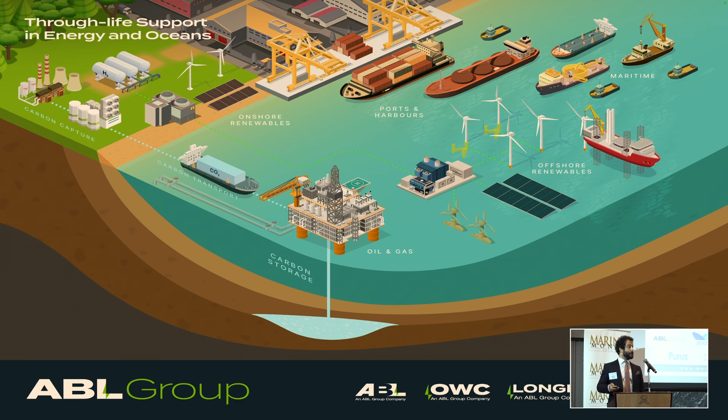So, after all this, let's dive into the topic. First, we need to ask ourselves: what is technical due diligence?

Imagine right now there are 3 engineers working on a project. One is not seeing anything deeper than the surface. The other is not hearing what others are saying, not hearing what the market is talking about. The other is not writing anything in the report they prepare as findings. Would that be a technical due diligence in that case? Well, obviously not. This is exactly the opposite of what I just said, but we need a description here.

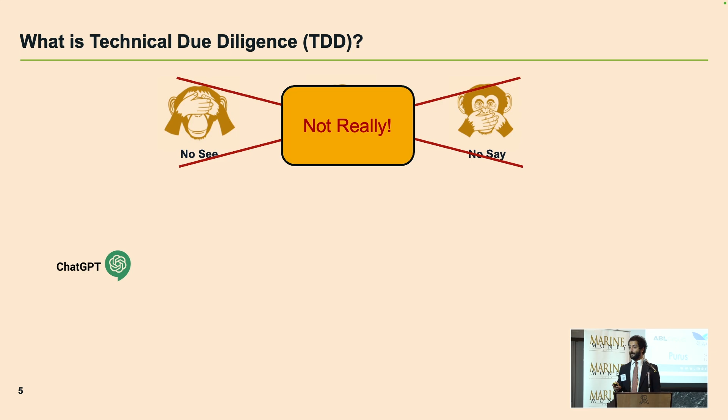So I asked ChatGPT, and ChatGPT says: imagine a team of Sherlock Holmes with calculators and hard hats, who are conducting an objective evaluation to uncover risks, assess feasibility, and verify performance of a project.

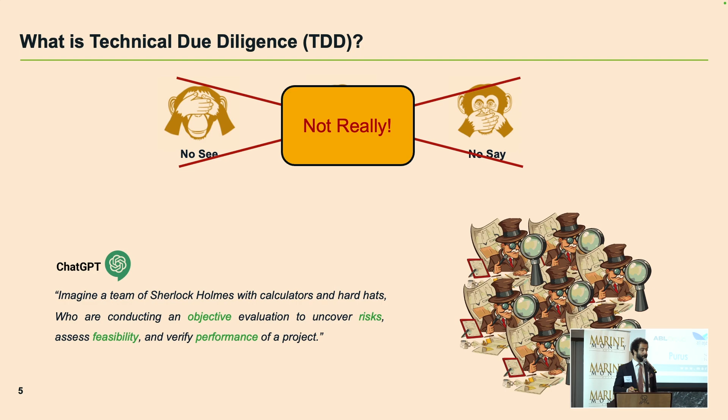Okay, but why do we need technical due diligence? Imagine a scenario: you've been dreaming of a blue car since ages, okay?

You cannot afford the brand new one, you need the second-hand one. You're saving and saving and saving. Your hard-earned money is in your pocket. You go to a dealership. You see your brand new, nice, beautiful blue car there. What do you do? Your hard-earned money in your pocket, you put it on the table, and then you say, shut up and take my money and give me my car.

No, we don't do that. We actually do something opposite. We just ask them to have a look at the car, or take the car to a service center, to ensure that the car is working properly, and then the car is going to be providing me the service that I paid for, for the next 10 to 15 years, right?

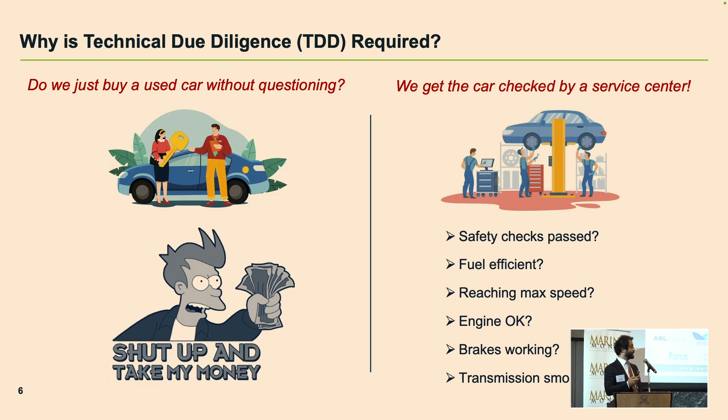So in a project environment, it's the exact same story. If I have some funds available, what I would then do is look for a project to invest my money in. Obviously, I want this project to return some investment on my investment, right?

And projects are complex. To be exact, on a floating offshore wind technical due diligence, there are in total 12 different disciplines that we employ. Basically, we cannot know everything about all these disciplines. That's why we go to an independent company and ask them to carry out a technical due diligence study for us. Then we identify some risks, we try to mitigate them, and the best thing of all is we renegotiate the terms and conditions and reduce the prices, okay?

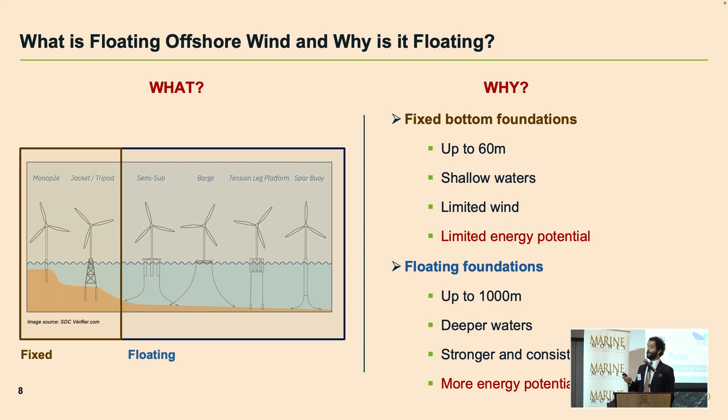The answer is clear. Fixed bottom is in shallow waters, limited wind, which means limited energy. But we want more energy. That means we can go with floating offshore wind to deeper waters where there is constant and strong wind, which means we can get more energy out of it.

Okay, that's the story. Let's look at the timeline of offshore wind. The story started in the early 2000s, and we are right now in 2025. As you can see, there are some pilot projects and demonstrator projects, but we still don't see any commercial floating offshore wind farm in place. The reason for that is there are so many risks and uncertainties still, okay?

I want you to focus on this from 2025 until 2050. Whichever database you look at, you will see so many projects planned within this period. Nothing happened so far in the last 25 years, not so much happened—not nothing, but that does not mean nothing will happen in the next 25 years.

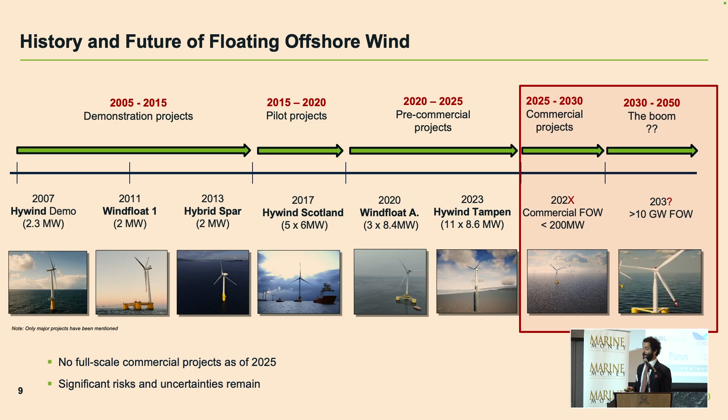It will take time, but it's gonna happen, it will happen. But, as the title suggests, transition can catch you out. What does that mean? It is going to be a bumpy road, okay? It's not going to be easy. So things will go wrong.

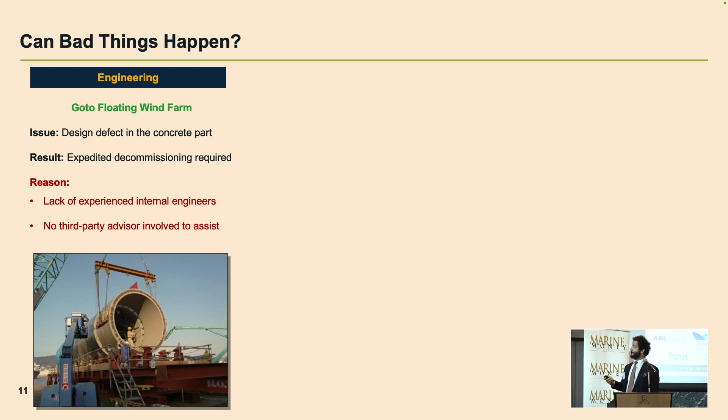And things went wrong in floating offshore wind. One example here, you see the Goto floating offshore wind farm. They designed the floaters wrongly because they did not consider the fatigue. And after installation, they had to decommission 2 of these floaters that they installed.

Another one, Fukushima—basically, during the installation, they couldn't ballast it properly. There was an issue, obviously. So you see that excessive list, it almost capsized.

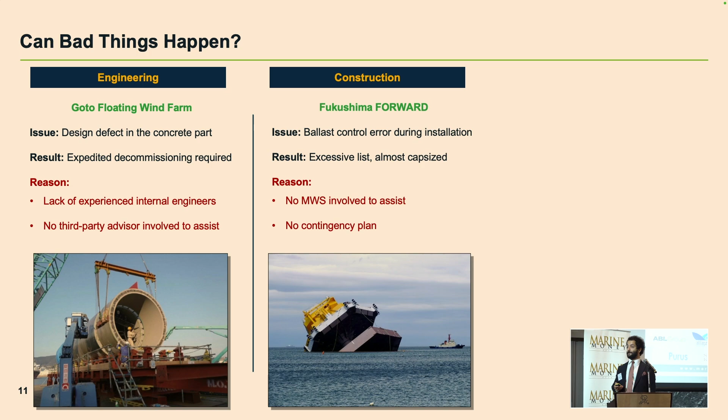This is the one that I love, Hywind Scotland. After 7 years of service, the entire offshore wind farm, floating, needed to go through an operations and maintenance campaign, which means they had to tow this entire thing to port, and they paid millions and millions and millions. Could I have saved this money? Absolutely, yes.

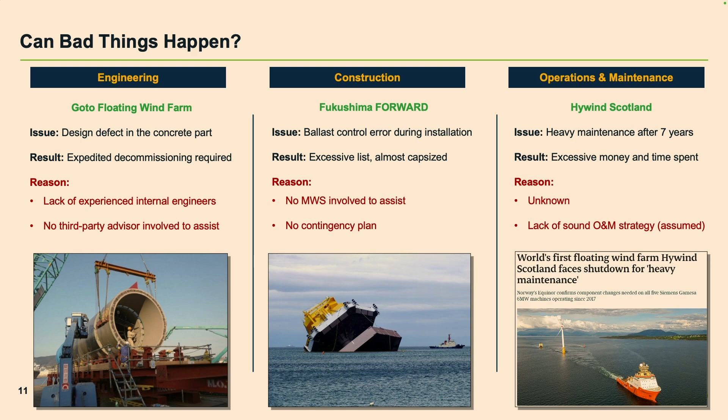So after all these, I would like to dive into the challenges. What are the challenges? The first one is CapEx, OpEx, and the decommissioning expenses.

So look at this one: 2 exact same capacity offshore wind farms. The fixed cost, let's say $2.3 billion, and floating would cost $3.6 billion for a same capacity, 450 megawatt offshore wind farm. The difference is $1.4 billion. For those who cannot imagine what this means: 1 million seconds is 11.5 days, 1 billion seconds is 31.7 years. What I'm trying to say is the cost difference is enormous at the moment.

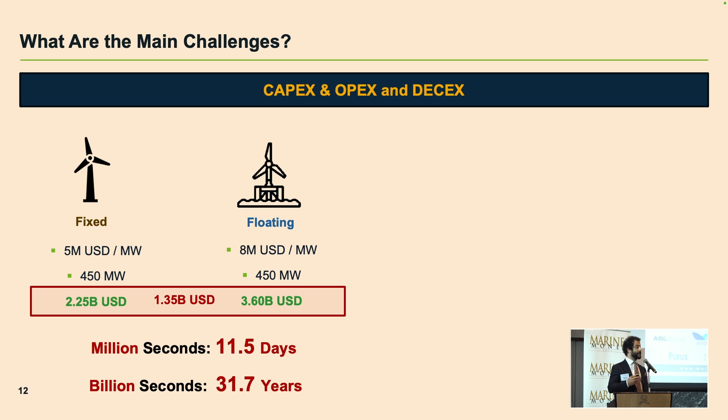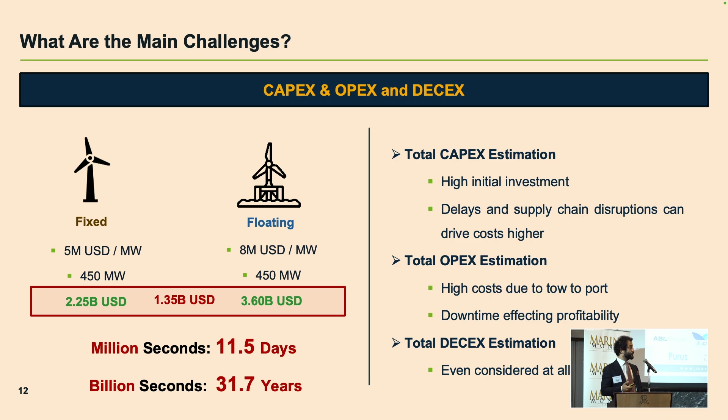So there are high investment costs, and due to the uncertainties, potential delays, and supply chain disruptions, the cost can go even higher and higher. And OpEx—because of the tow-to-port story we are discussing, the downtime of the turbine is crazy. So you're not just paying for the operations and maintenance, at the same time you're losing money from the profitability that you would make.

The last one is a very funny one. In the technical due diligence stories we do, the decommissioning expenses are sometimes not even considered. These offshore wind farms need to be decommissioned at some point, and there will be a crazy amount of money put into this. It will eat from the profitability that you calculate from day one.

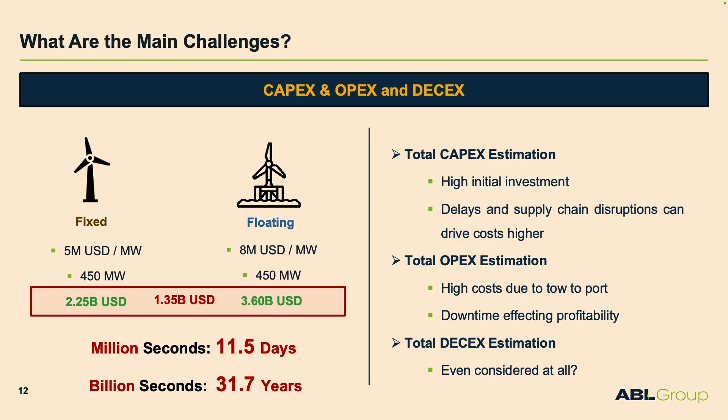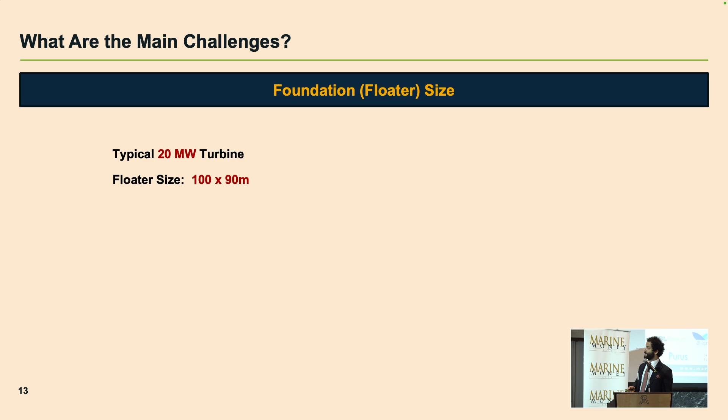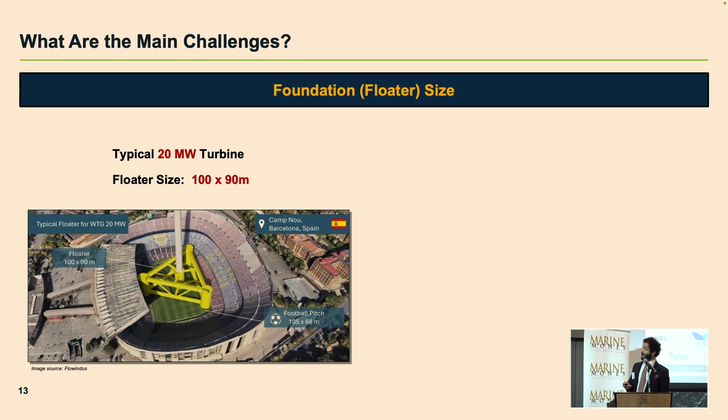So what does that mean? There's a fabrication problem—are there suitable fabricators around which can actually fabricate these on a commercial scale? Number one. Interim transport—these things need to be fabricated somewhere, then transported to a port so they can be taken to be installed. Tow-to-port approach—as we said, they will be towed to port to do the maintenance, and for that you need dry docks, like for ships. Are there any dry docks available?

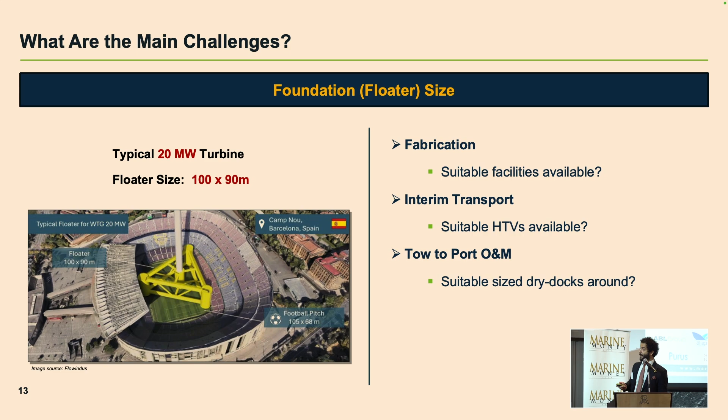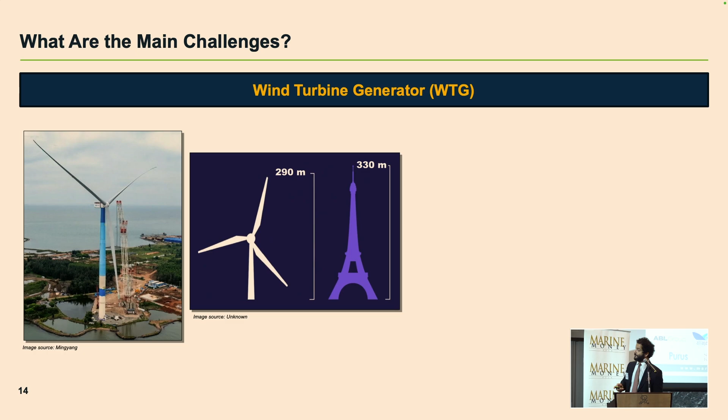Next one is interesting. Most of you have seen the Mingyang 20 megawatt turbine, which is right now tested onshore. To imagine what this size is all about, there's a comparison picture I found, comparing it to the Eiffel Tower. The Eiffel Tower is 330 meters, and this thing is 290 meters tall.

The interesting thing is look at this blade. 290 meters tall, with one blade size of around 150 meters. Imagine all the ships available in the entire world and how many of them can transport this. Increasing sizes obviously create logistics, transportation, and installation problems.

Reliability is another problem at the moment. We said Mingyang - no offense here - but when we say Chinese, the industry stops and thinks five times about whether these things are reliable. Even for wind turbines already in use, when doing technical due diligence, we look at the failure history: what is the downtime, how many times a component exchange was needed, what was the downtime of that, which means how much money I lost.

The next one is again delivery - if they're going to basically be delivered as promised.

But the last point is very interesting. We all talk about these problems politically - today we talked about the US and all this stuff. We all know what's there politically. The question we all ask is: one day, like it happened with solar panels, China will supply so many turbines to Europe or the entire world. It will happen, it's unavoidable. So the question is, after 25 years from now, due to some political issues, will there be any sanctions? Will my turbines actually be utilized, and will all the required spares be provided or not? All these questions are still remaining.

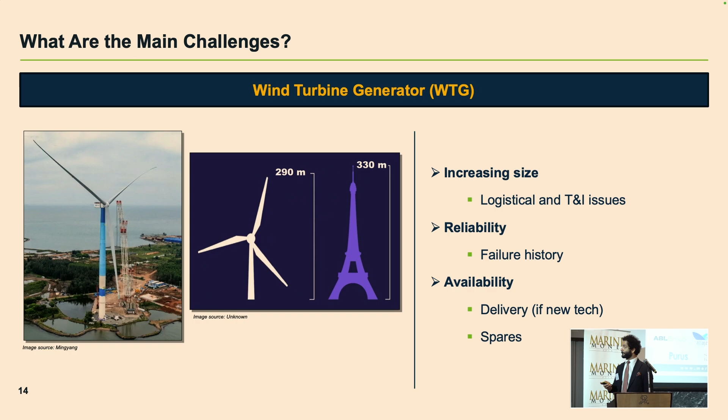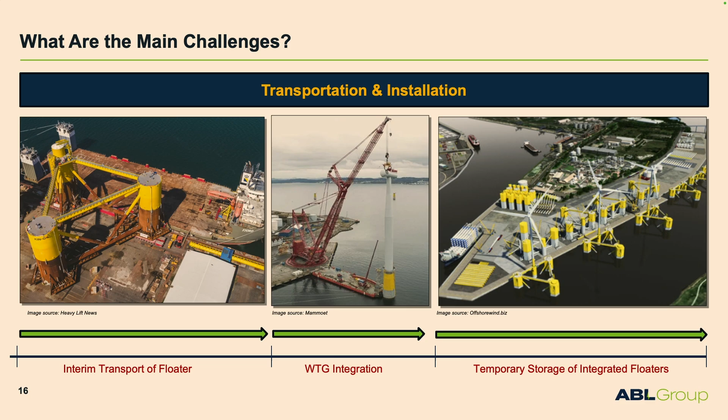Next one is my lovely topic - I'm a T&I guy. Transportation and installation is a complex topic, and for floating offshore wind it's even more complex. These floaters are constructed or fabricated somewhere and need to be transported by heavy transport vessels, HTVs, from the fabrication yard to the yard they're taken afterward - the port, basically, the marshalling port we call it. Afterward, at that port, they would be integrated with the turbines.

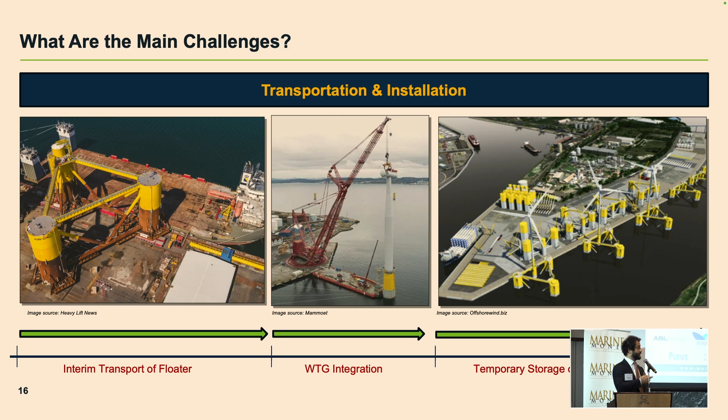That means assembling the turbine sections on top of the floater. Then at the port, after they're integrated, these turbines would wait in line, in queue, for their turn to be taken offshore for installation. While this is happening, we would simultaneously install the anchors and chains, and the dynamic cables - which transmit electricity between the turbines and also to shore. The anchors and chains are there to hold the station of the floater.

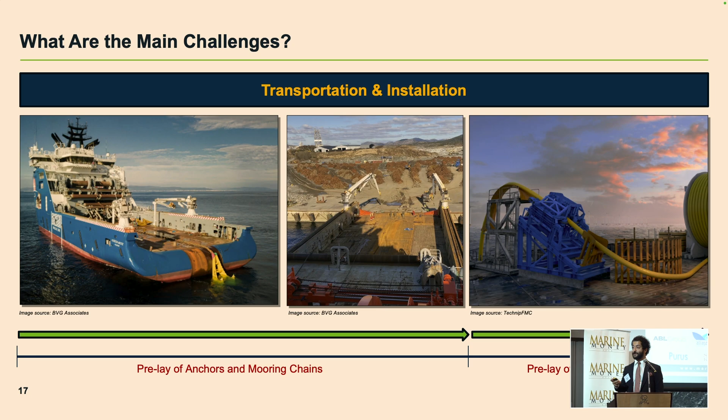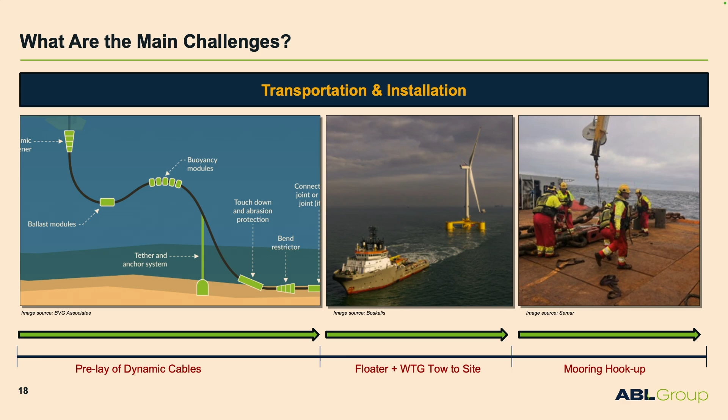Then the floater is towed to the site. We do the mooring hookup, which means connecting the floater to the mooring lines already pre-installed, and then connect the cables to the floater - we call it cable hookup. Then the hookup is complete, and you have a beautiful floating offshore wind farm. It's very easy to explain, isn't it?

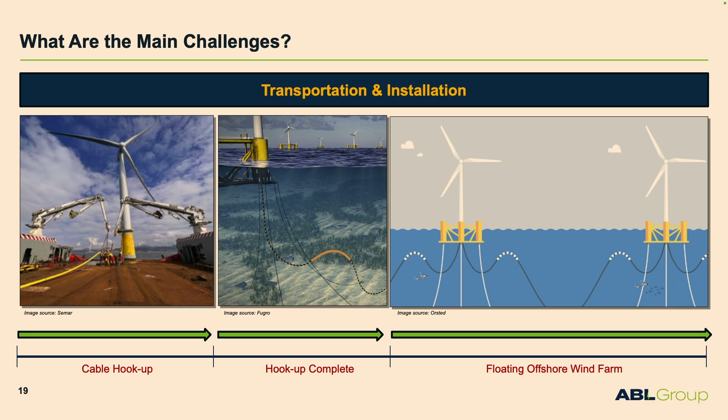In reality, so many things can go wrong in this entire story I just explained. I cannot talk about all these risks today, but I have some of them here. The first is suitability of the port - is the port big enough to do the assembly and temporary storage of the floaters? Let me tell you something very interesting: in Europe, we are working on maybe 5 or 6 projects simultaneously, and all of them want to use the same port.

Which project is going to use this port? This port is available, everybody says, I'm going to use that port. In reality, maybe this port is not even going to be available.

Availability of vessels and cranes. Again, we are talking about AHTS with crazy bollard pull requirements, literally needing around 200 tons bollard pull to tow these things around. If you use one single vessel, it's not even possible. How many of them are available? You need to think about this and plan it accordingly.

Ring cranes. You have seen these crazy heights, around 300 meters for the turbine. These things are huge. We need some large ring cranes or even jack-up vessels to integrate these onto the floater.

Experience of the EPCI contractor is interesting. It's a new technology. Not everybody is experienced in how to install it, like in oil and gas, so there will be some problems. In the contracts that you sign, there will be so many gaps. There are gaps. We do these technical due diligence studies. We see these at the moment.

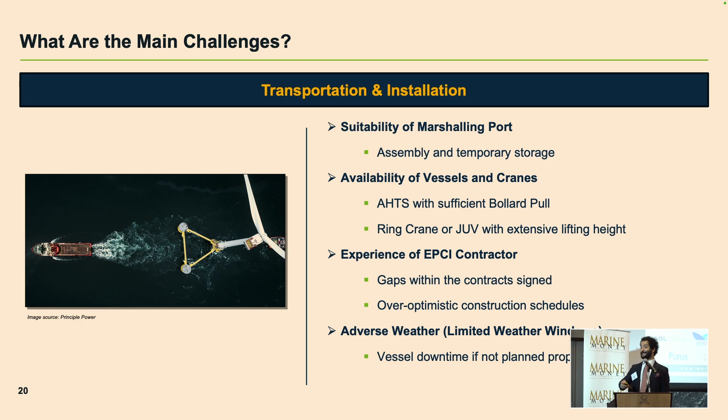An optimistic construction schedule - everybody says I'm going to install, say, one turbine every week. Good luck with that. It's not going to happen, I can tell you that. And the project shows that on paper at the moment, and the money is spent based on these projects, based on these assumptions.

Adverse weather. Everything is floating. What does that mean? That means I am bound to the weather. If the weather doesn't allow, I cannot do anything, and there will be problems if it is not planned properly. All of this vessel spread that we need will be waiting on standby. Who is paying for that?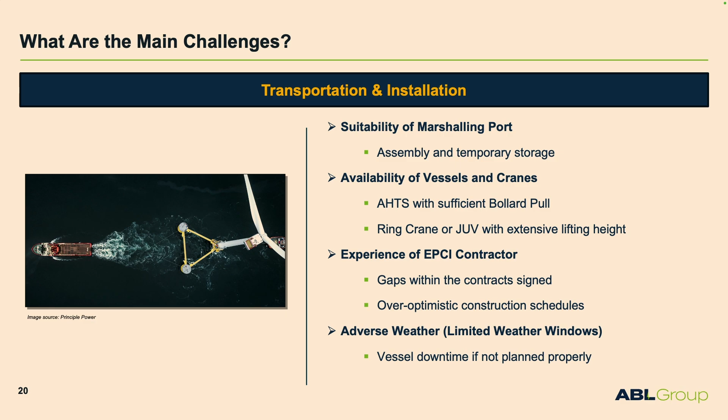The next one is operations and maintenance. We talked about the tow-to-port approach, remember. What is that actually? All this T&I stuff I explained sounds like a joke, but it's reality. For the tow-to-port approach, operations and maintenance has to be done in reverse.

For each turbine, whenever we need to change a blade, at the moment it's happening like this: you have to disconnect all the mooring lines, all the cables, tow this entire thing to port, put it into dry dock, fix it, and then tow it back and reconnect. What does that mean? My turbine is not generating electricity during this entire time. Did we consider this in our profitability analysis in the very beginning? If you didn't, you will have a problem.

And availability of the dry docks in close proximity is an issue. The sizes that I just showed, right? I'm talking about 90 to 100 meters. What dry dock is there right now which can accept it? It's very difficult to plan these things.

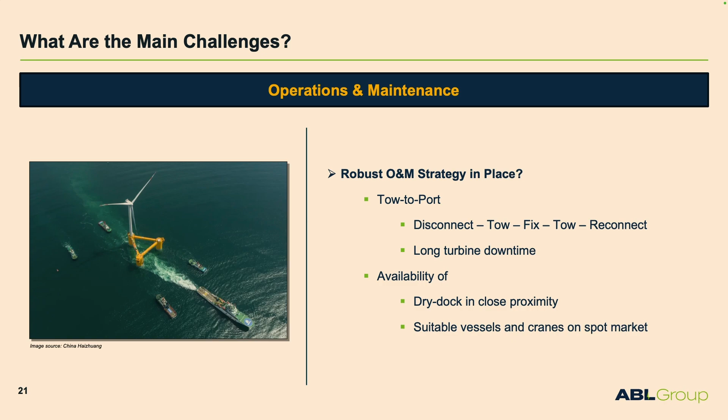And suitable vessels and cranes, again, on the spot market, okay? You need to change a turbine, a blade, let's say. You go to the market and say, I need a 200-ton bollard pull AHTS. Good luck with that - it will be very difficult for you to find it. Even if there is one, it is most probably used in another project.

So all these risks - the question is, is it possible to de-risk? Well, the answer is yes. If you engage a partner which has the global experience with the local expertise, they can be involved in doing the TDD and LTA, as we call it, to de-risk the project. This company - I'm not saying you have to hire ABL Group, okay, put this aside - but this company makes sure that they have the theoretical experience, knowledge, and the practical experience. That is a must to be able to identify the risks.

So basically, I'm saying a project company involved in projects during the planning and execution stage on more than 1,000 projects, let's say, and a company that provided TDD and LTA support to hundreds of projects and hundreds of vessel acquisitions. Well, obviously, I'm talking about the experience of ABL Group here. That's a different story, right?

The conclusion: floating offshore wind can actually float. That we can clearly say. But in order to make it float, the funds need to be available. The funds are available, but we need to make sure that there are more demonstrator projects so that we can actually learn from them, okay? And we need to involve more advisors and experts with robust experience to support us to identify the projects and identify the risks and then mitigate them.

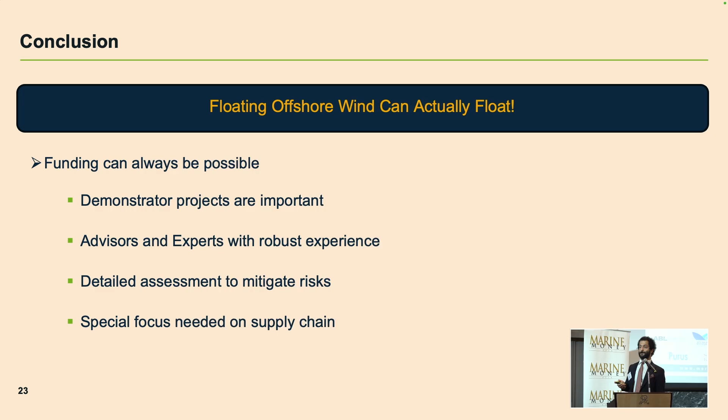The last one is very important, also relevant to today, obviously: special focus is absolutely needed on the supply chain.